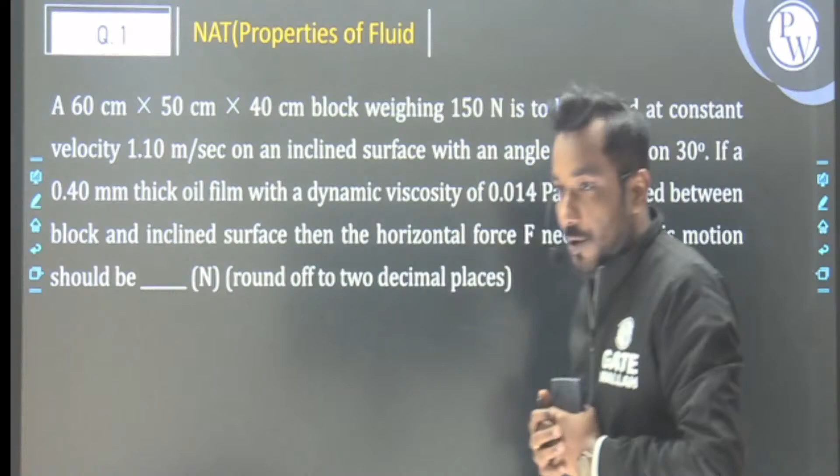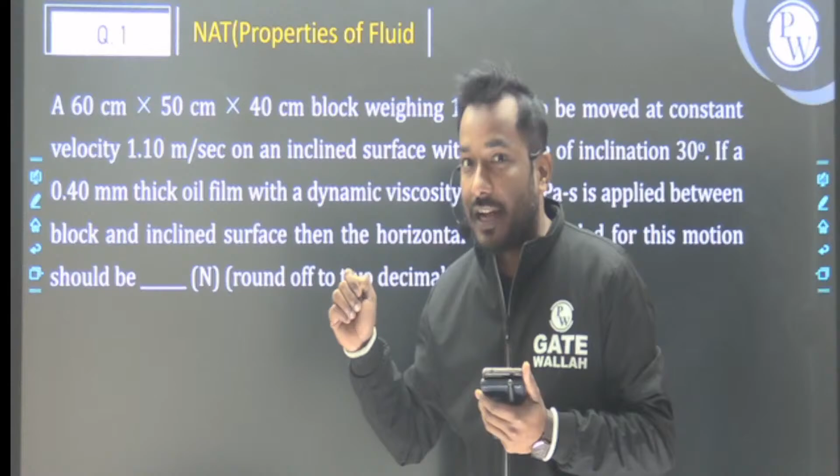So the first question is an NAT type question, and that question is from properties of a fluid. I'm going to read the question first, properly, one by one, and then we should see the solution in a detailed way.

Let me read the question carefully. In the question they are saying: a 60 into 50 into 40 centimeter block, and the weight of the block is 150 Newton. It is to move at a constant velocity of 1.1 meter per second on an inclined surface with an angle of inclination of 30 degrees.

If a 0.40 mm thick oil film with a dynamic viscosity given as 0.014 Pascal second is applied between the block and the inclined surface, then they are asking to calculate the horizontal force F needed for this motion. The answer should be in Newton, and you need to calculate up to 2 decimal places.

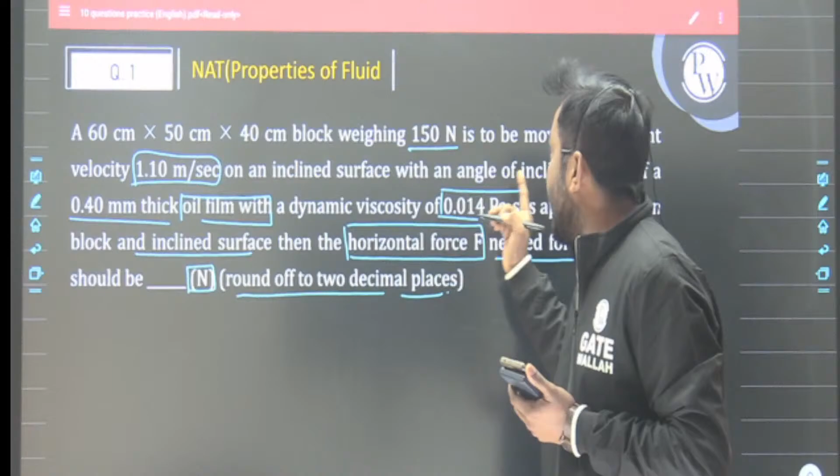In the question, they have given the dimensions of the block and already given the weight, mg, as 150 Newton, moving at a constant velocity of 1.10 meter per second on an inclined surface with an angle of inclination of 30 degrees. Remember, sometimes the inclination angle is given from the vertical, but in this case, the angle of inclination is given from the horizontal surface. With a 0.4 mm thickness oil film of dynamic viscosity 0.014 Pascal second, in SI units, applied between the block and the inclined surface, we need to calculate the horizontal force F required to sustain this motion - the block is moving up the inclined surface.

You should calculate how much force is required in the horizontal direction to maintain a constant velocity of 1.10 meter per second. So it means if velocity is going to be constant, acceleration is 0.

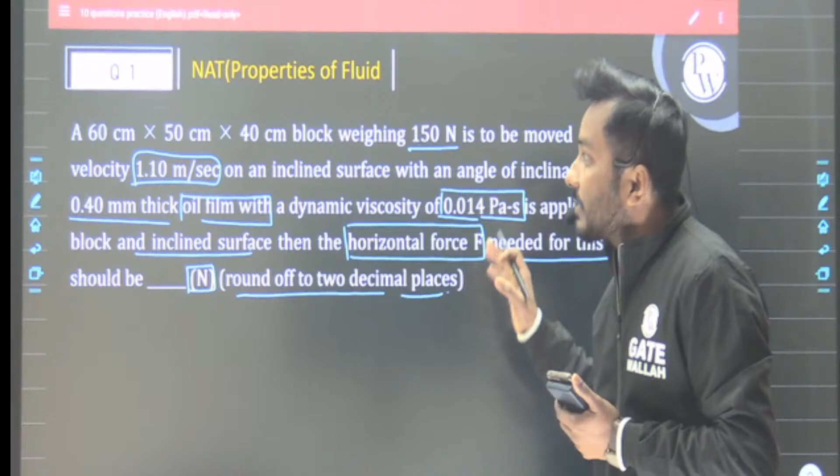First we are going to draw the free body diagram and then apply Newton's second law of motion and balance the forces. Once you get the balance equation, you should easily calculate the force which is required. In this type of question, you should maintain proper concentration, because if you commit a mistake, you will get a wrong answer.

Let me draw the first diagram according to the question. This is our inclined surface, and this is our block, a rectangular block whose dimensions are given. This is our solid block.

The weight of the block is given, and this angle theta is 30 degrees, given from the horizontal. The weight of the block is given as 150 Newton.

Between the block and the inclined surface, we should introduce an oil film, whose dynamic viscosity is given. This is the oil fluid film.

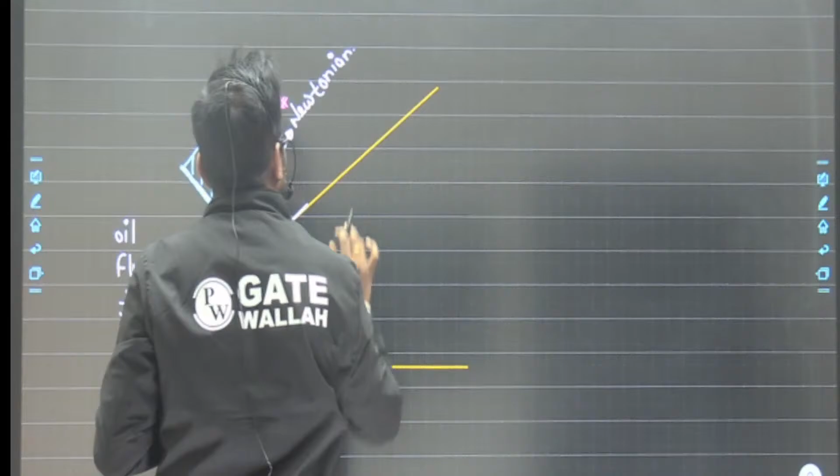The fluid is given as Newtonian. This is our first assumption: Newtonian oil fluid, and the velocity profile is linear.

The velocity profile is a linear velocity profile, so you should assume that. The clearance length is also given in the question.

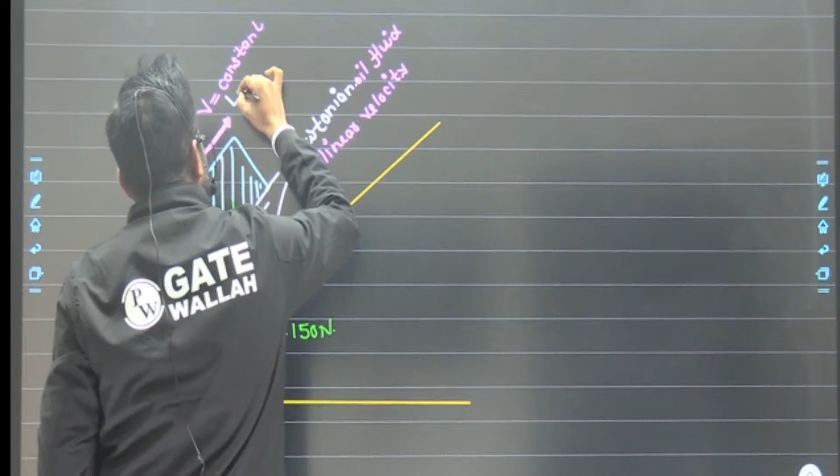If we draw the free body diagram of this block, the block is moving with constant velocity v. If velocity is constant, the acceleration of the block should be 0. When the block starts moving in the upward direction with constant velocity v, acceleration is 0.

But to maintain this type of motion, we need to apply an external horizontal force, and you need to determine this horizontal force. So when the block starts moving on the inclined surface, we apply the no-slip velocity boundary condition at the solid surfaces.

We assume that at this surface y is equal to 0 meters, and at this surface y is equal to h, which is given in the question. The velocity profile is linear, so if you draw the velocity profile in the clearance, you get the slope of this velocity profile.

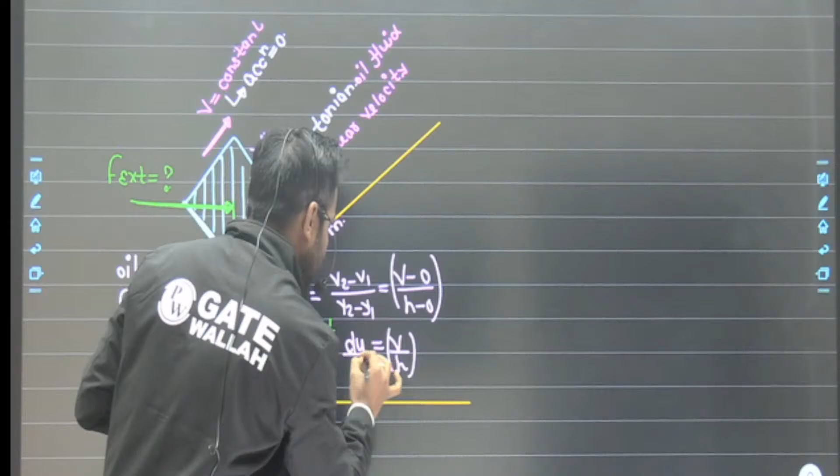What is the slope for this velocity profile? You can write du by dy, at this point the velocity is v, so du/dy equals v2 minus v1 divided by y2 minus y1, that is v minus 0 divided by h minus 0, so that is v divided by h. This is du/dy.

If we draw the free body diagram for this block, let me draw it. This angle should be theta, which is given.

This is the line of action of our weight, and this one is the horizontal force which you applied. If we extend this line of action, this is our external force, and this angle should be 90 minus theta. So in this direction, the component of the weight is weight sine theta.

In this, weight sine theta, and the perpendicular of the inclined surface is weight cos theta. This angle should be theta, and this angle is going to be theta as well.

If we take the component of external force in horizontal and vertical, this is our direction of motion. This one is direction of motion, and this should be perpendicular to the motion.

So if we resolve F external, this angle is going to be 90 minus theta, and this one is theta.

So if we resolve this external force, this component is F external sine theta, and this component should be F external cos theta.

And acceleration is 0, you can say acceleration is 0.

When the block starts moving on the Newtonian fluid, the fluid should offer a resistance opposite to the motion. That resistance force you can write as tau multiplied by area of the surface.

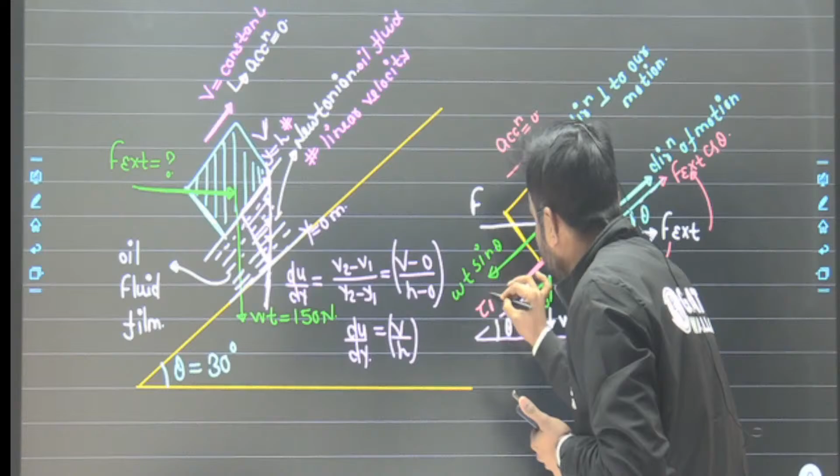So in this direction, one more force will come into the picture, and that is tau multiplied by area. This resistance force is offered by the Newtonian oil or fluid. This film will offer a resistance force opposite to the motion of the block.

In this scenario, the block is moving upward, so the fluid resists in the downward direction. If we consider the direction of motion, there are three forces: in the direction of motion this force acts, and this one and this one are in the opposite direction. So we should apply Newton's second law of motion in the direction of motion.

We should apply the NLM2, Newton's second law of motion, in the direction of the motion.

We should consider the positive direction as the motion direction, and opposite to the motion, let the force be negative in magnitude.

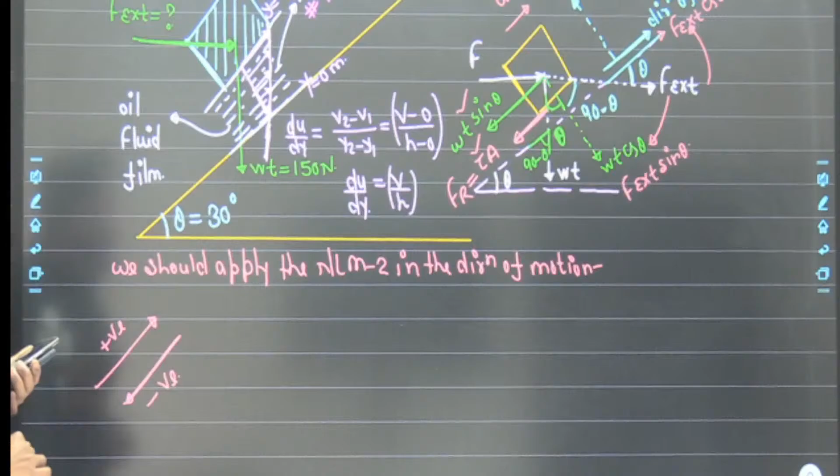So if we balance the forces: F external is positive, F external cos theta should be positive, minus weight sin theta since weight sin theta is in opposite direction, minus tau multiplied by area which is also in opposite direction, is equal to 0, because our acceleration should be 0. So mass into acceleration on the right hand side is completely 0.

So if I put in the magnitude, let me just write F external, and the angle is given as 30 degree.

So that is cos 30 degree, and weight is 150, and that is sin 30 degree, minus tau. For Newtonian fluid, you can write mu du by dy, multiplied by area, is equal to 0.

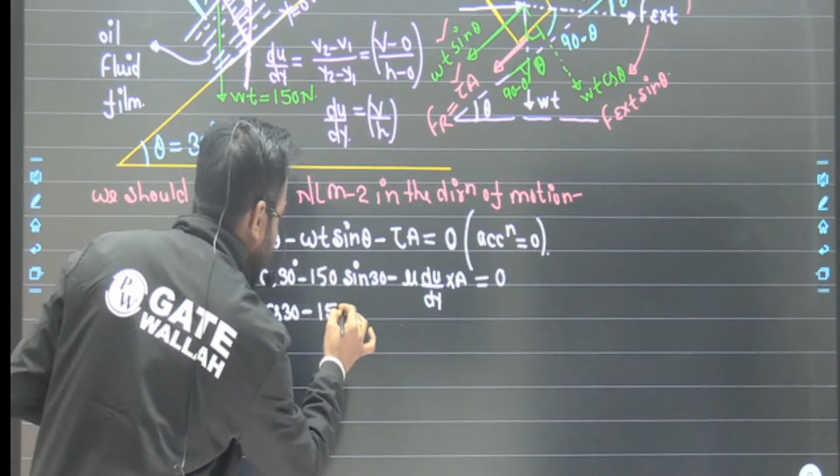So we need to calculate our external force. Let me put another parameter: sin 30 degree, and dynamic viscosity is given as 0.014.

Velocity is given as 1.10 meter per second, divided by clearance. So what should be the clearance? Clearance should be 0.40 mm, so let me write 0.40 mm. We should multiply by 10 to the power minus 3, so that is converted into meters.

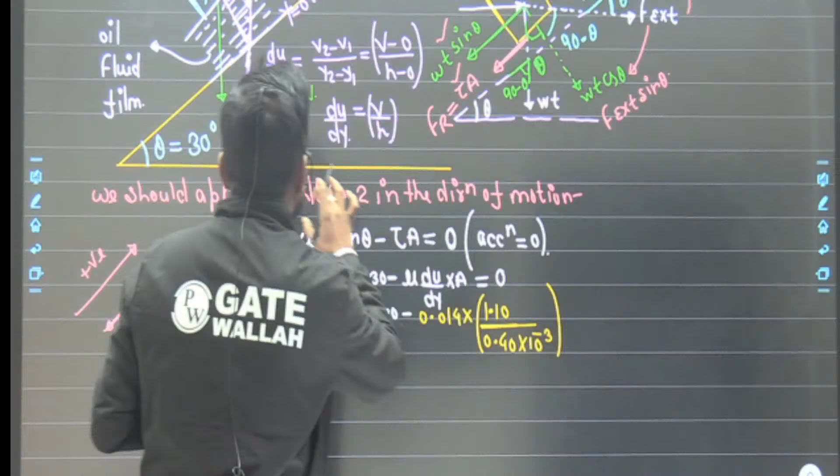And area, what is the area of the block? The dimension is given as this is our length of the block, this is the width, and this should be the height. So the area in contact is length into width.

This face is in contact with the Newtonian fluid. This is our length, and the depth inside the plane is the width. So width into length gives the contact area with the block.

Okay, so where is the calculation? The dimension is 60 centimeter into 50 centimeter. We should convert 60 centimeter into meter, so that is 0.60 multiplied by 0.50 meter. So area is equal to A, is equal to A.

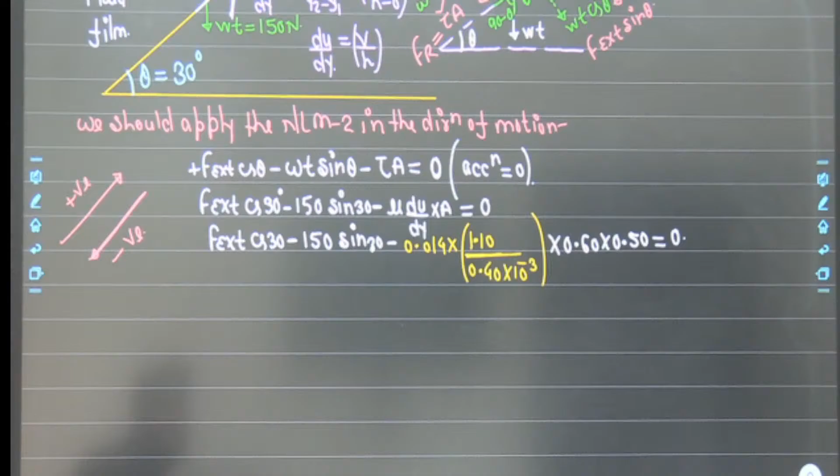Let me just calculate what is the magnitude of the external force. So this is going to be 150 into sine of 30 degree. Let me write: F external cos 30 degree minus 75 minus 1.1 divided by 0.40, multiplied by 1000 multiplied by 0.014 and multiplied by 0.60 multiplied by 0.50. So that is 11.55 is equal to 0.

So plus 75, divided by cos of 30 degree. So our external force will come out to be 99.9393 Newton. This is our external applied force.

But we should give the answer up to 2 decimal places. So let me remove the other digit. This becomes a 4. So the correct answer should be 99.94 Newton.

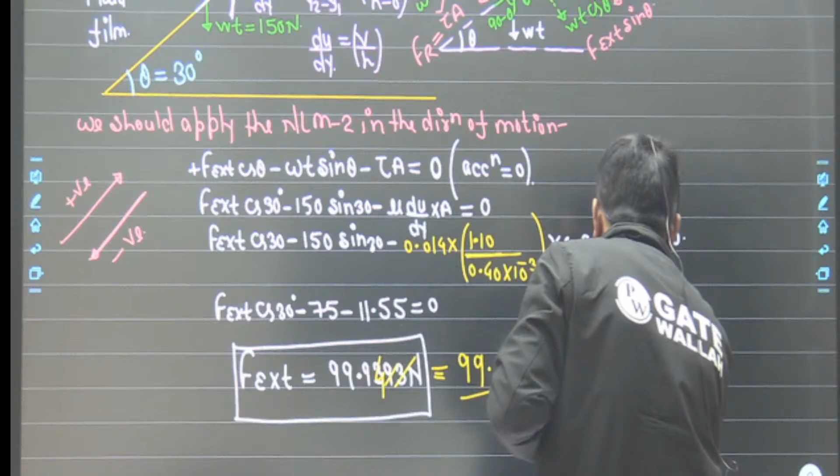The required external force is 99.94 Newton. You require 99.94 Newton of external force to support this type of motion.

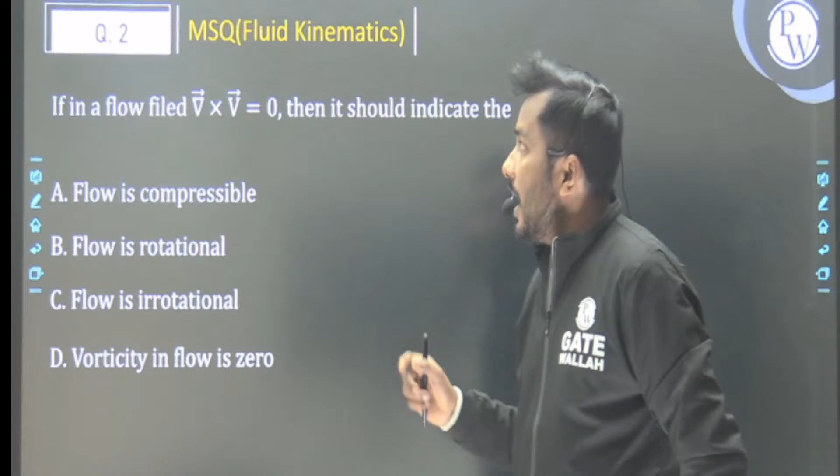In the question they are saying that if in a flow field del cross V is equal to 0, then it should indicate the... that question is one of the best questions from fluid kinematics.

So let me discuss the solution for this question. If curl of velocity vector is 0, our angular velocity is written as half of del cross V vector. So if del cross V vector is 0, our angular velocity also becomes 0.

And if angular velocity is 0, the flow is irrotational in nature. Flow is irrotational in nature.

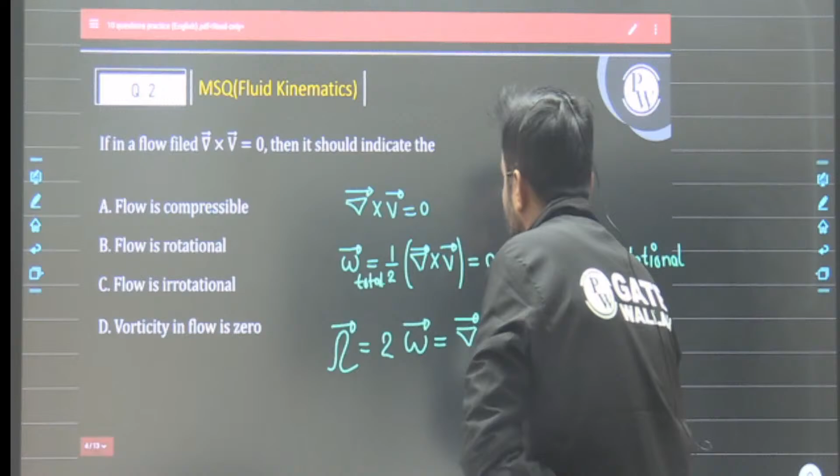So flow becomes irrotational, and we know that our vorticity vector is twice of the angular velocity, which is also del cross V vector. So if del cross V vector is 0, our vorticity also becomes 0. So is flow incompressible?

No. Flow is incompressible when divergence of the velocity vector becomes 0, that is, when del dot V vector becomes 0.

So the correct answer should be... sorry, not B, this is rotational. So the correct answer should be C, and vorticity in flow also becomes 0.

So for question number 2, the correct answer should be C and D. Clear? C and D is the correct answer. The flow should be irrotational in nature, and our vorticity vector is 0. Clear? Vorticity vector should be 0.

This is an MSQ type of question, so if the question is MSQ in nature, more than one option will be correct. For this particular question, the answer C will be correct and D will be correct. Clear? So I hope you understand the solution of the question.

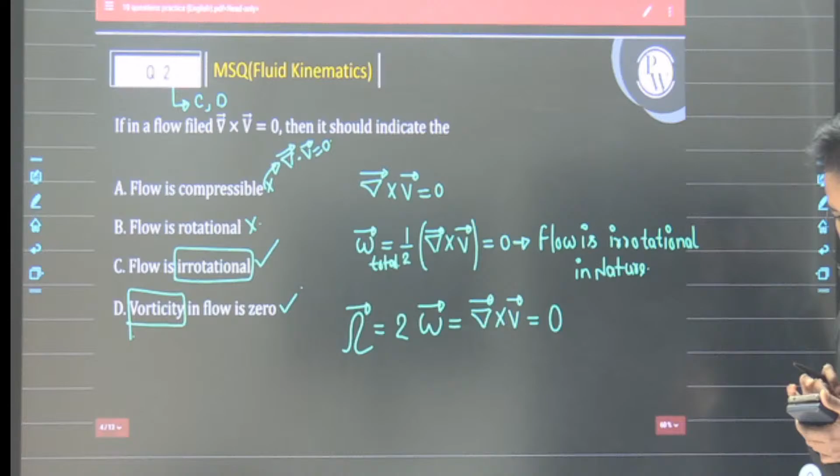So can I move on to the next question? Okay, so let me move on to our next question. Move on to question number 3.

So read the question carefully. Question number 3 is the example of forced vortex motion, and that question is MCQ type. Let me just give the question number. This is question number 2, this is question number 3. So this is question number 3. Read the question carefully, and that question is the example of forced vortex motion.

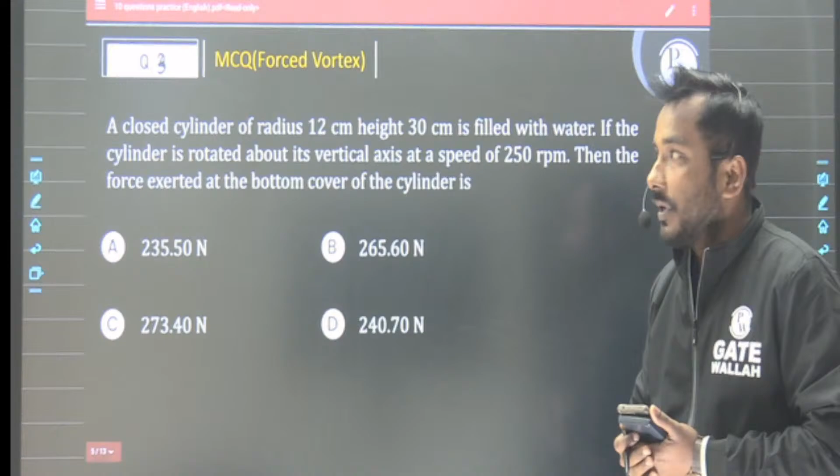Forced vortex motion. Clear? In the question they are saying that a closed cylinder of radius 12 centimeter, radius is given as 12 centimeter, and height is given as 30 centimeter, is filled with water. So further, if the cylinder is rotated about its vertical axis at a speed of 250 rpm, then the force exerted at the bottom cover of the cylinder should be...

Please note, in the question they are saying that the cylinder should be closed. Cylinder is closed, top surface is closed, and the radius is given as 12 centimeter, height is given as 30 centimeter, and rotational speed n is given as 250 rpm. Then you need to determine how much force is going to be acted on the bottom of the cylinder.

So let me first draw the diagram for this question. Clear? So there is a cylinder.

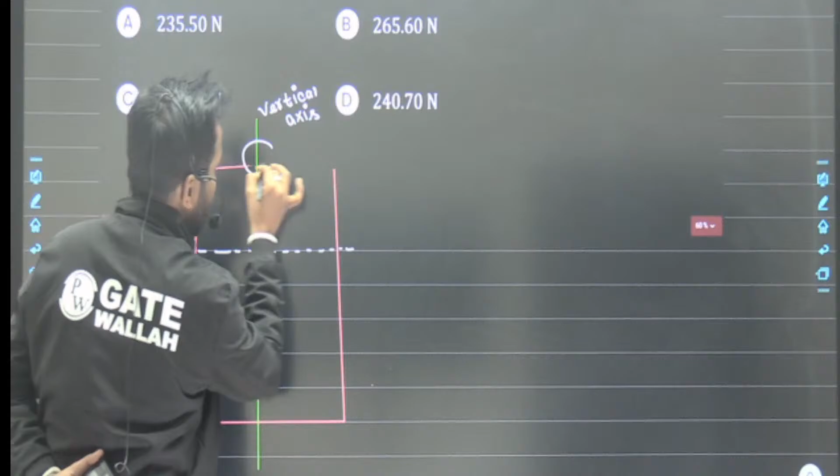This is our vertical axis, and this cylinder is rotated. This one is our vertical axis, and the cylinder is closed. So let me close the cylinder, because in the question they have mentioned that the cylinder is closed at the top. So this one is our closed cylinder, and the fluid is water.

The fluid is water, and we know that the density of water has magnitude 1000 kg per meter cube. The radius of the cylinder is given as 12 centimeter, or you can say 0.12 meter, and the height of the cylinder is given as 30 centimeter, or you can say 0.3 meter.

And the rotational speed of the cylinder is given as n is 250 rpm. Clear? 250 rpm.

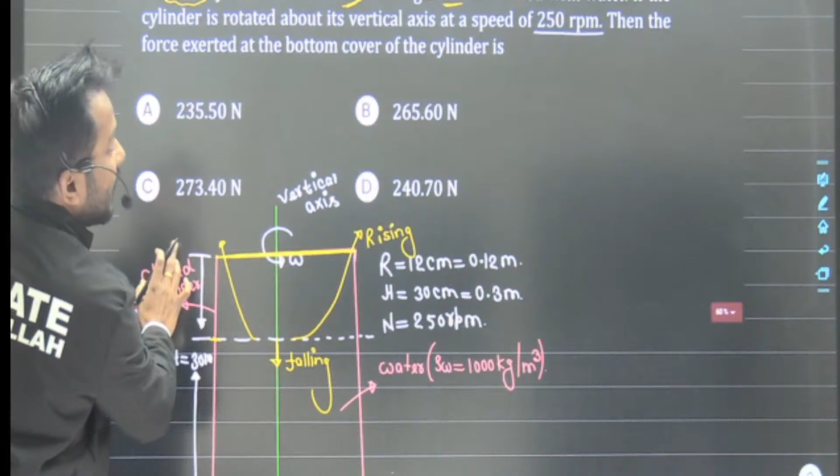So this parameter is given, and we know that if the cylinder is closed at the top, and if we rotate the cylinder, then due to the forced vortex effect, the fluid should try to rise at the surface of the cylinder, and at the center of the cylinder the fluid starts to fall. Clear? At the center fluid starts falling, and at the surface fluid should start rising.

Clear? I think the complete cylinder is filled with water. Actually, the cylinder is completely filled in this question. So let me just correct the diagram. Let me draw the next diagram. Actually, the cylinder is completely filled.

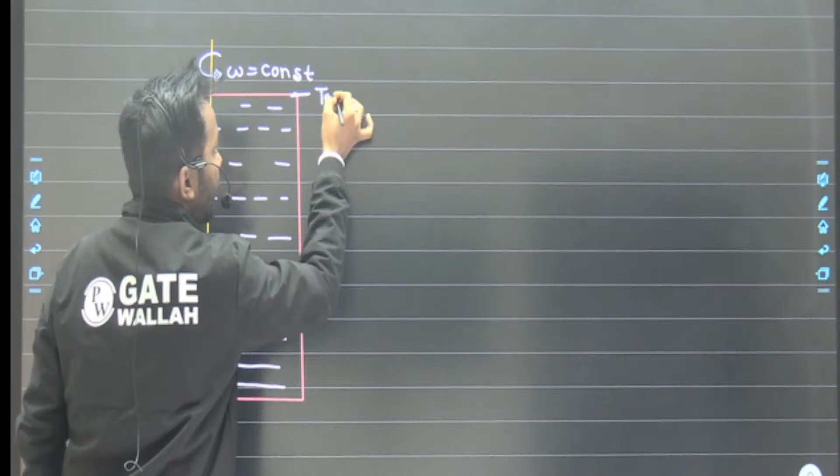So this is the cylinder, and this one is our vertical axis, and the cylinder is rotating about this vertical axis with constant angular velocity omega. So this velocity should be constant. Clear? And the cylinder is completely filled with water.

Cylinder is completely filled with water, so the top surface is closed. This is our top surface, and you need to determine the force at the bottom surface.

Please remember, first consider if the cylinder is not rotating. How much force acts at the bottom of the cylinder? That is equivalent to the weight of the fluid above the bottom surface.

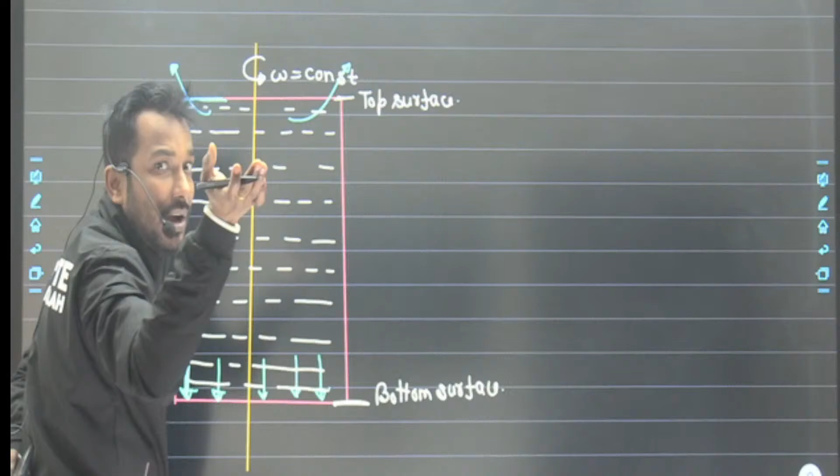So if the cylinder is not rotating, the force acted at the bottom is equivalent to the weight of the fluid. Once the cylinder starts rotating, the fluid will start to rise in the upward direction due to the forced vortex effect. But since it's a closed cylinder, the fluid cannot rise above the top surface.

So that fluid will start to develop a thrust force at the top of the surface. The fluid will try to remove the top surface, and due to the rotation, a thrust will be developed at the top surface, and that thrust will propagate to the bottom of the cylinder.

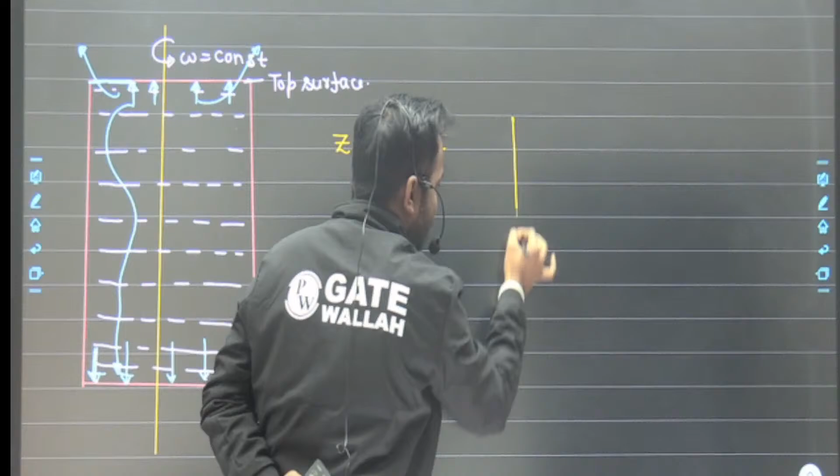So in this question, we need to calculate the total thrust force acting at the bottom of the cylinder. This total thrust force is equivalent to the weight of the fluid plus the forced vortex effect - the force developed due to the rotational effect at the bottom of the cylinder.

We should remember the concept of rise of height in a forced vortex: ZR equals omega square R square divided by 2g. For example, if this is an open cylinder and we rotate it about its central axis, let me draw this diagram for forced vortex, where this axis is our radial axis and this one is our vertical Z axis.

So at any radial distance r, this height ZR should be omega square R square divided by 2g. Okay, omega square R square divided by 2g.

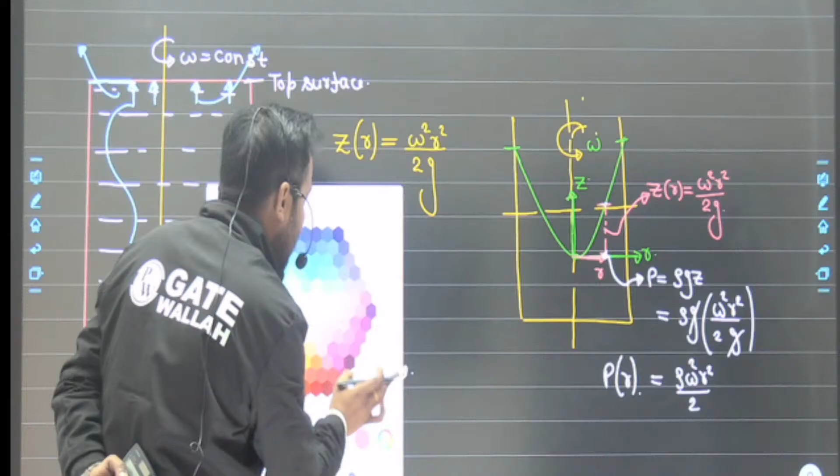So how much pressure will act at this point? The pressure P equals rho g into Z, because the height of fluid is Z. So if we write this, rho into the magnitude omega square R square divided by 2g - the g gets cancelled out, giving rho omega square R square divided by 2. This is the pressure intensity at any location R.

This is the pressure intensity at any location R. And if we write the force according to this pressure intensity, since this pressure intensity varies, to calculate the force we need to consider a small element at the bottom surface, of thickness dr and radius r. So this element has thickness dr, and the area should be 2 pi r dr.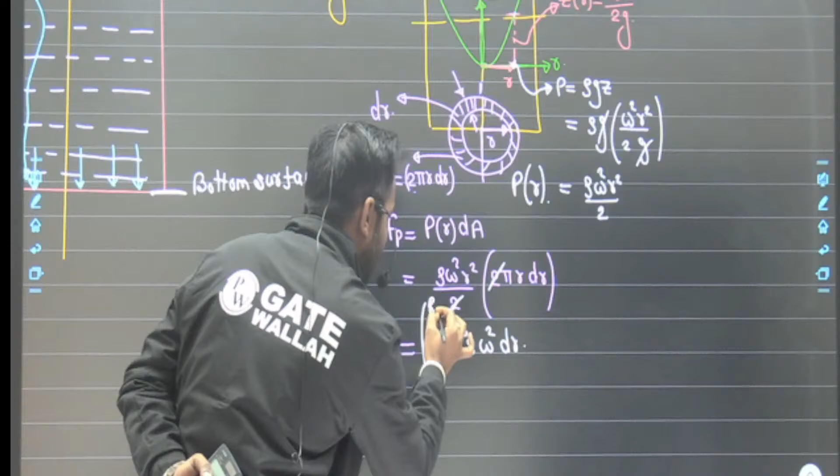So what is the force due to this? Force equals pressure intensity P(r) into area dA. That should be rho omega square R square divided by 2, and area is 2 pi r dr. So the 2's cancel out, giving pi r cube rho omega square dr. That is dF at p.

If we integrate for the total, from 0 to capital R, that comes out to rho pi omega square r to the power 4 divided by 4, with limits 0 to capital R. So what is the magnitude? That is rho pi omega square r power 4 divided by 4, in Newtons. I think this will be correct.

Our P as a function of r is rho omega square r square divided by 2, and if you multiply it by 2 pi r dr, the 2's cancel out, and if you integrate this from 0 to R, you get the pressure force at the bottom.

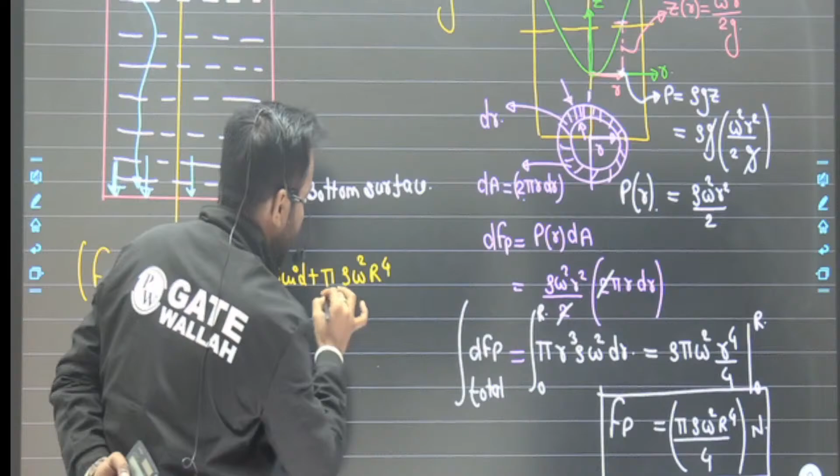Clear? So you should calculate this pressure force. Total force at the bottom of the cylinder is the weight of fluid plus this one, and that force is pi rho omega square r to the power 4 divided by 4.

Let me put the magnitude. What is the weight of the fluid above the cylinder bottom surface? That is pi, and volume is pi r square into h, rho into g. This is the weight, and that is pi rho omega square r to the power 4 divided by 4.

Clear? And what is the value of omega? Because n is given in the question, omega is 2 pi n by 60. Let me calculate omega first. Omega is 2 pi n divided by 60.

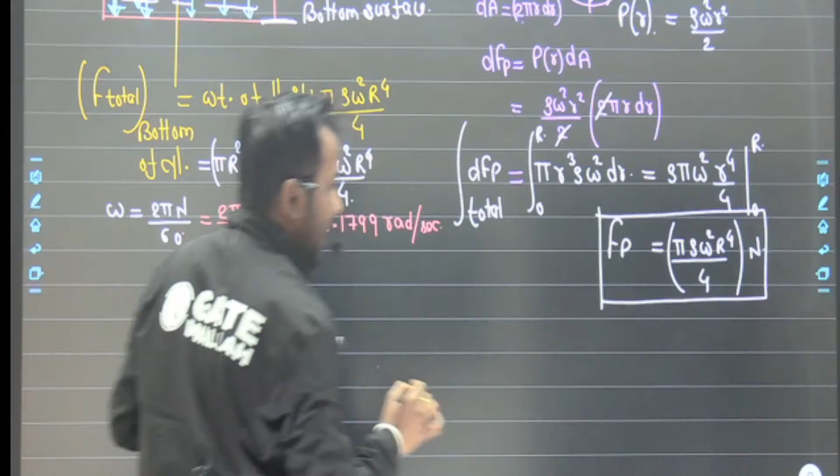n is given to us as 250 rpm. So let me put the magnitude: 250 rpm divided by 60. So 2 multiplied by pi multiplied by 250 divided by 60. That will come out to be 26.1799 radian per second.

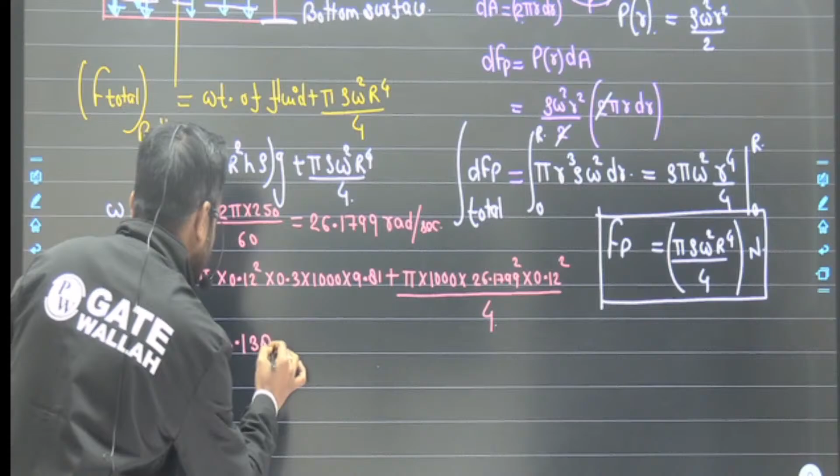R is given, so let me put the value. R is 0.12 meter, and h is given as 0.3, multiplied by rho which is 1000, multiplied by 9.81. Then this value is pi, rho is again 1000, multiplied by omega which is 26.1799 square, multiplied by radius 0.12 square divided by 4.

So calculate this value: pi multiplied by 0.12 square multiplied by 0.3 multiplied by 1000 multiplied by 9.81. This will come out to be 133.1381 Newton, plus this magnitude should be pi into 1000 multiplied by 26.1799 square multiplied by 0.12 square divided by 4.

Let me check where I'm going, that power should be 4. So pi, this is 1000 multiplied by 26.1799 square multiplied by 0.12 to the power 4, divided by 4.

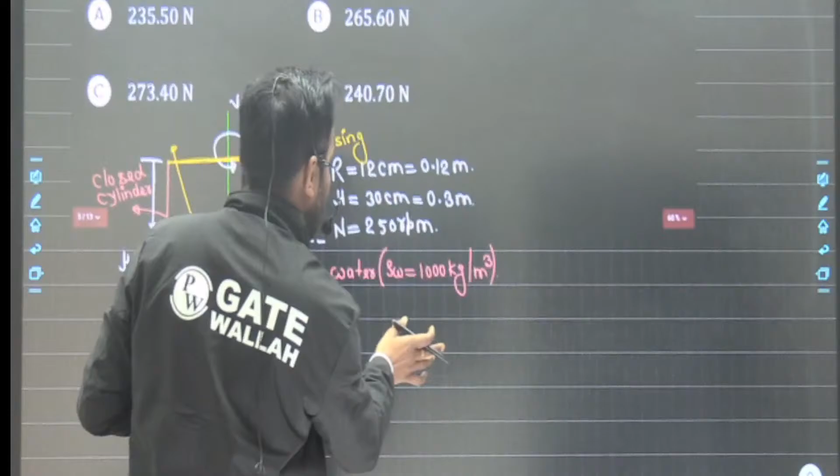That will come out to 111.6226 Newton, plus 133.1381. So that should be 244.76 Newton.

I think I have committed a mistake. 240 is given, but 244 is coming out, so where did I make the mistake? Height is given as 30 cm.

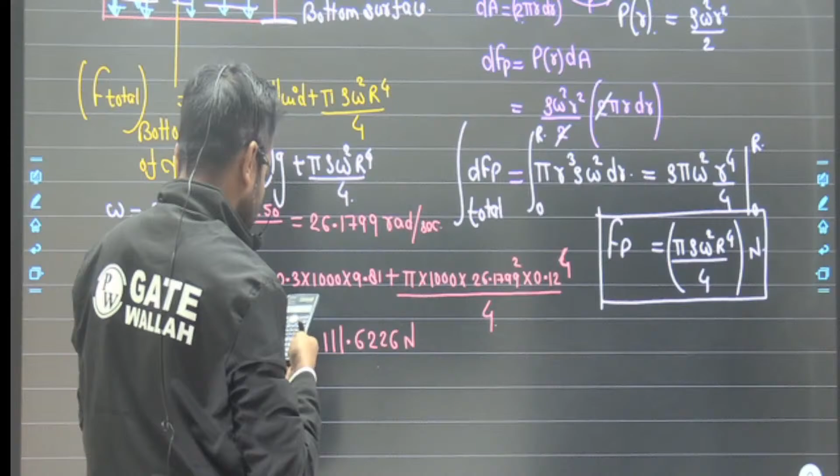Let me cross check the calculation. I put 9.81, height is given as this. So pi r square h rho g, 2 pi n by 60, 2 multiplied by pi multiplied by 250 divided by 60, so that is 26.1799. This calculation is correct, and this is pi multiplied by 0.12 square multiplied by 0.3, which is pi r square h, the volume, multiplied by 1000 multiplied by 9.81, giving 133.138. So that is correct.

Let me check the second calculation. That is pi multiplied by 1000 multiplied by omega, and omega is 26.1799, multiplied by 0.12 raised to the power 4, divided by 4. That comes out to this, plus 133.138, so that is 244.760 Newton. So the answer will be correct.

That answer will be correct. Actually this is 244, please note this is just a printing mistake. So that is 244.76. So the correct answer should be D. For this question, the correct answer should be D.

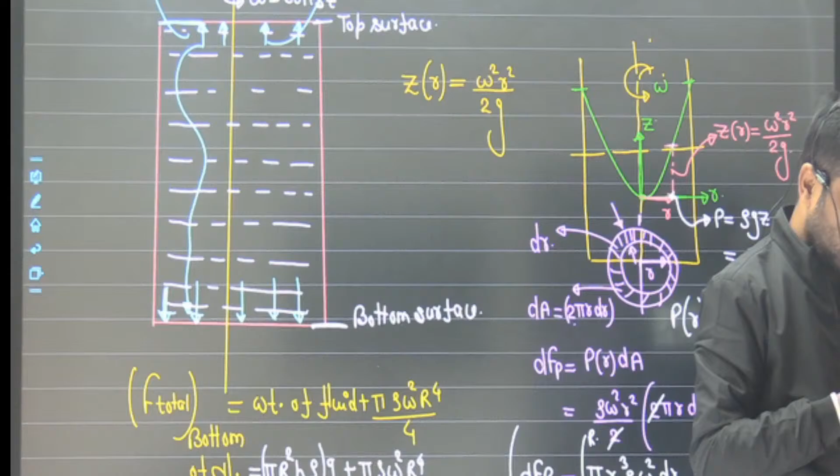This is a complete detailed solution for this question, and I'm expecting this year one question is coming from forced vortex motion. This is the best example regarding forced vortex motion. I think you should understand the complete solution.

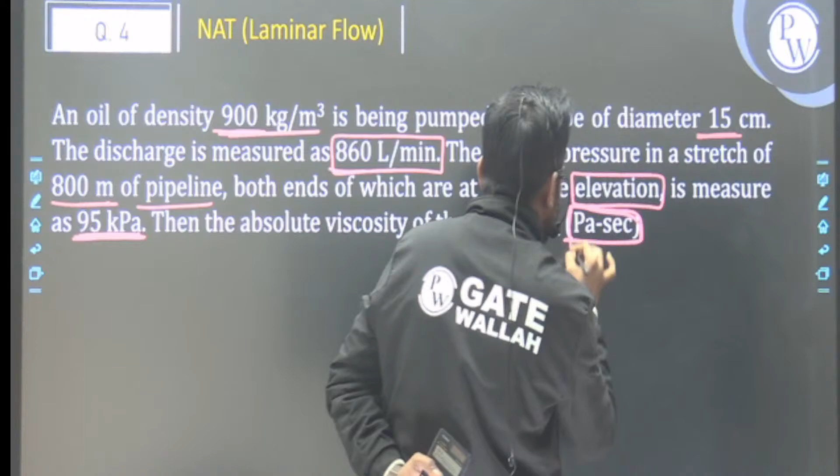In the question they are saying an oil of density 900 kg per meter cube is being pumped in a pipe of diameter 15 centimeter. The discharge is measured as 860 liter per minute. The drop in pressure in a stretch of 800 meter of pipeline, both ends of which are at the same elevation, is measured as 95 kPa. You need to calculate the magnitude of absolute viscosity of the oil in Pascal second.

So let me move to this question on the board. First we should draw the diagram for this question. Let me draw the diagram.

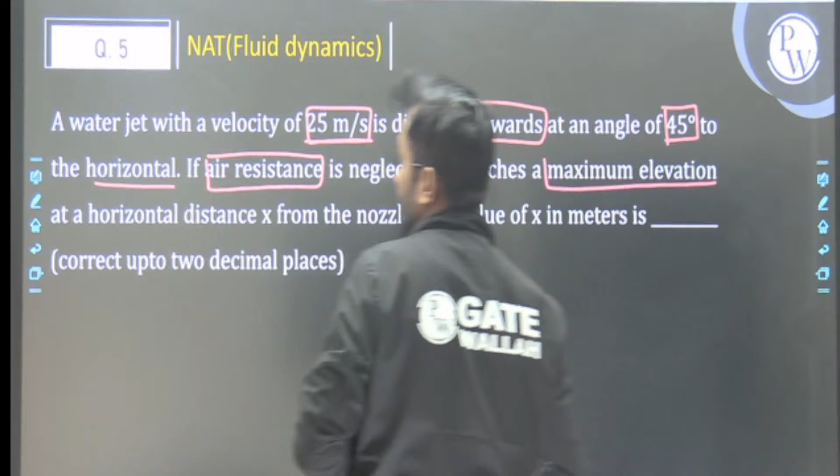According to the question: an oil of density 900 kg per meter cube is pumped in a pipe of diameter 15 centimeter. The discharge is measured as 860 liter per minute. The drop in pressure in a stretch of 800 meter of pipeline, both ends at the same elevation, is measured as 95 kPa. We need to determine the absolute viscosity, and the drop in pressure is given according to the diameter and length, so we should assume the flow is fully developed laminar.

If we assume the flow should be fully developed laminar, we can use the expression for delta P as 32 mu u mean L divided by d square. So delta P is equal to 32 mu u mean L divided by d square.

What is the magnitude of delta P? That is 95 kPa, so we multiply by 10 to the power 3 to get Pascal. So 32 mu we need to calculate, and what is u mean? The mean velocity of the flow should be the discharge divided by area.

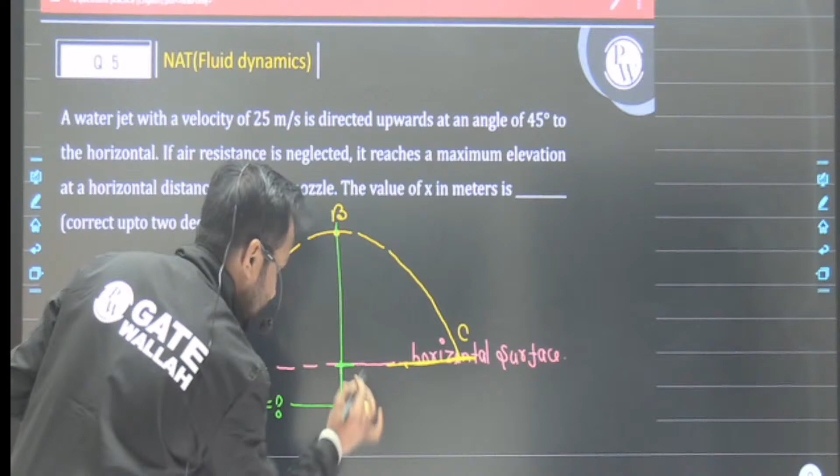What is the magnitude of discharge? That is 860 liter per minute, so we convert this to meter cube per second, and divide by area which is pi by 4 times diameter, 0.15 square. If I calculate this: 0.860 divided by 60, multiplied by 4 divided by pi, divided by 0.15 square.

That comes out to be 0.8110 meter per second - this is our mean velocity of the flow. 860 into 10 raised to power minus 3, divided by 60 because that's liter per minute, multiplied by 4 divided by pi, divided by 0.15 squared. So velocity comes out to be 0.8110 meter per second.

That is the mean velocity of the flow, and length is given as 800 meter. So velocity is 0.8110, length is 800 meter, and divided by d square, where d is 0.15 square. So the value of dynamic viscosity from here we can easily calculate.

That is 95 into 0.15 square, multiplied by 1000, divided by 32, divided by 0.8110, divided by 800. So the dynamic viscosity comes out to be 0.10295 kg per meter second, or you can say Pascal second.

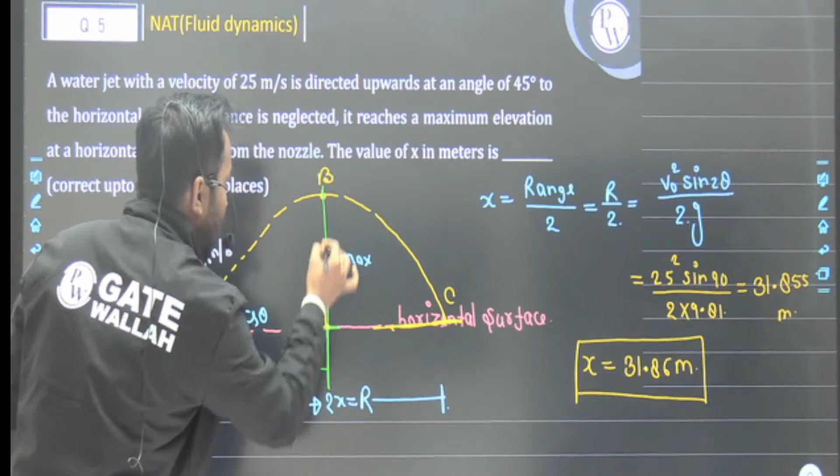Question number 5. Let me move on to our next question. Question number 5 is a NAT type question from the fluid dynamics topic. First you should read the question carefully, and then we should solve it.

In the question they are saying that a water jet with a velocity of 25 meter per second is directed upward at an angle of 45 degree from the horizontal. If air resistance is neglected, it reaches a maximum elevation at a horizontal distance x from the nozzle. The value of x is in meter.

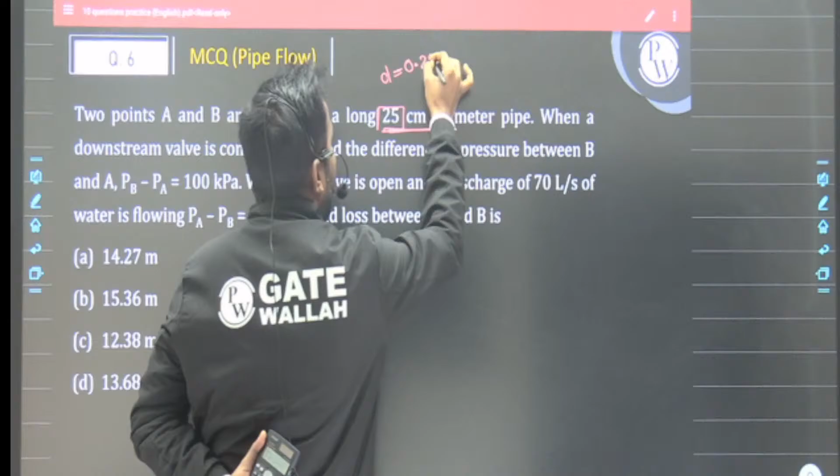So in question number 5, if we draw the simple diagram, we can say there is a nozzle placed inclined from the horizontal. This is our nozzle, and this is our horizontal surface. The jet is issued from this nozzle with a velocity V0, given as 25 meter per second, and this velocity is at an angle theta.

This jet should follow the projectile trajectory, and at some point let me consider this point A, the topmost point is point B, and this point should be point C. So you need to determine this length x, the magnitude of x, because at location B the y should be the maximum.

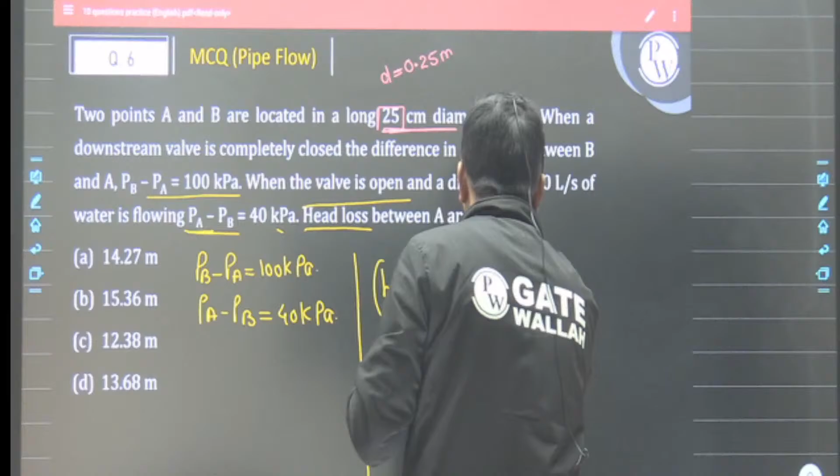Y should be maximum, and we know the formula for this complete 2x, and that 2x is called the range in projectile motion. So basically our x is equal to the range divided by 2. If you know the formula for range, you can directly put the value of r, or the expression for r, and calculate x.

Or you can apply the balance equation, component equation. In this direction the velocity should be V0 cos theta, and vertical should be V0 sin theta. Use the basic concept of mechanics, or put the value of r, which is V0 square sine 2theta divided by g, and that divided by 2.

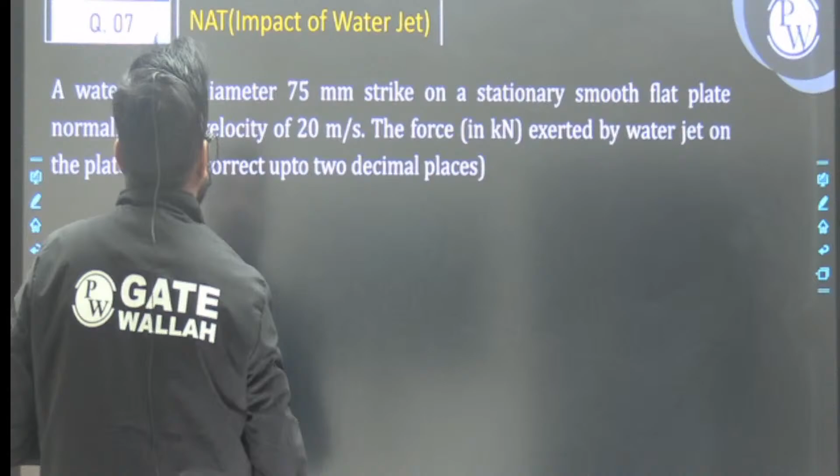So if we put the magnitude of velocity, that is 25 square multiplied by sine 2 into 45, so that becomes sine 90 degree, divided by 2, and g should be 9.81. So that will come out divided by 2 into 9.81, which gives x equal to 31.85 or 31.86 meter, at which the vertical height is maximum.

Vertical height should be maximum. I think you get the correct answer for this question. If you don't remember or haven't learned this formula, you can just use a simple basic kinematic equation, using the components of velocity in horizontal and vertical directions, to calculate the value of x.

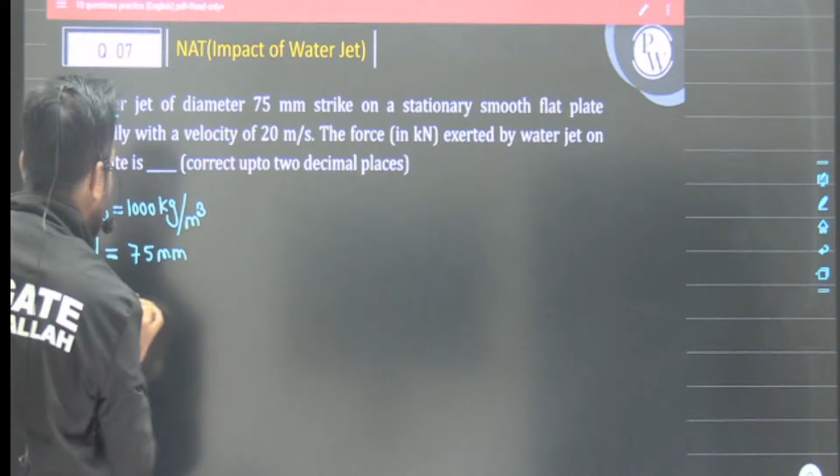Maybe one or two questions are asked from pipe flow and laminar flow. So both topics are important and crucial. Please focus on laminar and pipe flow.

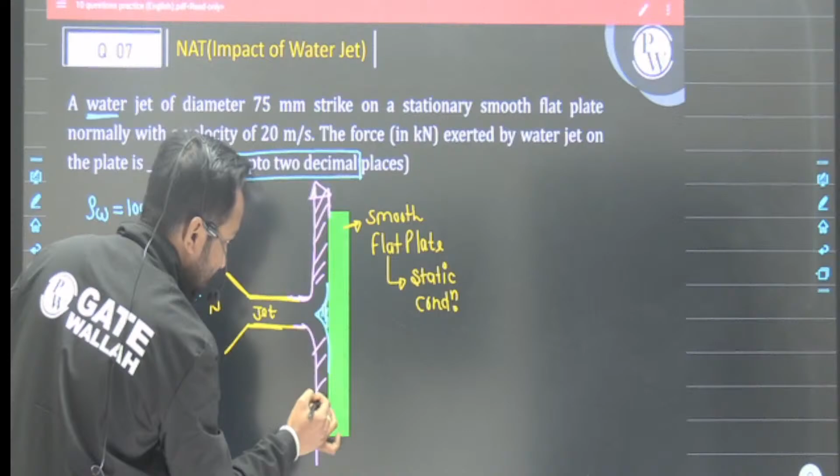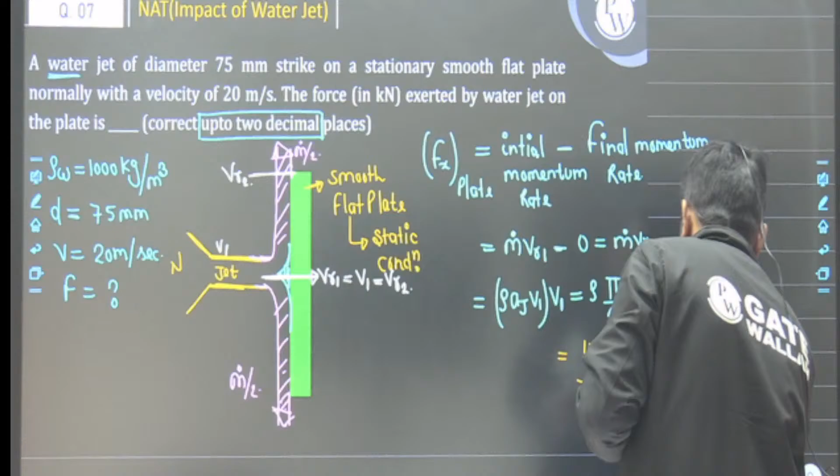Impact of water jet on a solid surface. Please read question number 7 carefully.

In question number 7, they are saying that a water jet of diameter 75 mm strikes a stationary smooth flat plate normally, with a velocity of 20 meter per second. You need to calculate the force in kilonewton exerted by the water jet on the flat plate.

So what is given in the question? A water jet, so the fluid is water. The density of water is 1000 kg per meter cube, and the diameter is given as 75 mm.

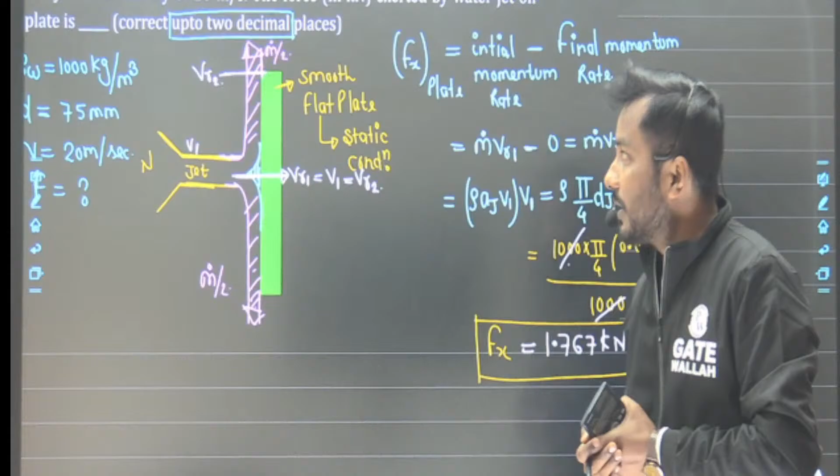It strikes a stationary smooth flat plate normally with a velocity of 20 meter per second. You need to determine the force in kilonewton on the plate, up to 2 correct decimal places.

Let me draw the diagram. This is our flat plate, and let me place the jet splitter here. A water jet comes out and strikes the flat plate. This is our nozzle, and this is the jet. The plate is stationary, so this is a smooth flat plate.

This is our smooth flat plate, and this plate is in a stationary, or static, condition. When the jet strikes at the center of this plate, the jet splitter splits this jet into two equal portions. Half the mass, m by 2, goes in the upward direction, and the other half moves in the downward direction.

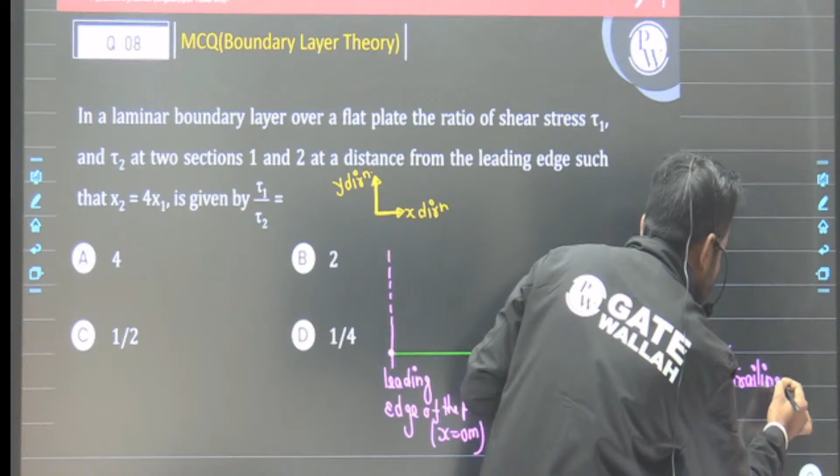So the horizontal force needed, or developed on the plate, we can write as Fx on the plate, which is the rate of change of linear momentum of the fluid, or the reverse force acted on the fluid element. So you can write: initial momentum rate minus final momentum rate.

So what is the initial momentum rate? Velocity and diameter are given, so you can write m dot. Velocity is vr1, and the final velocity in the x direction becomes 0. So that is m dot into VR1. In this problem, VR1 equals V1, and m dot equals rho times area times V1, which is our mass flow rate. Multiplied by V1, this becomes the force.

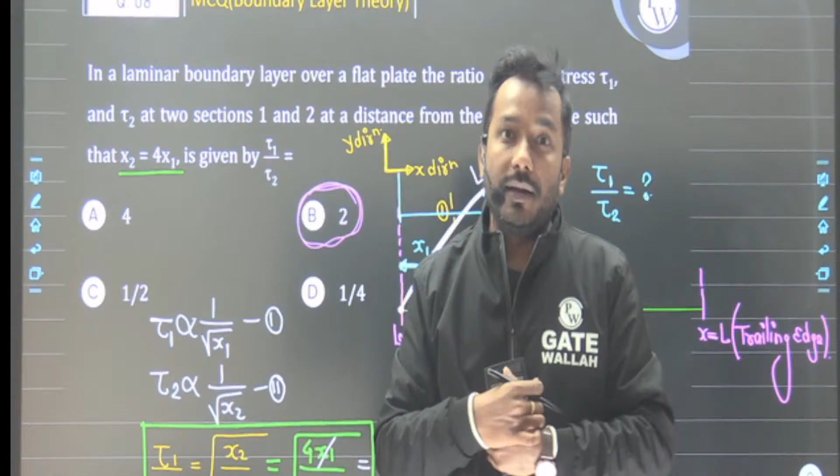So A, rho, and area should be pi by 4 times diameter squared, multiplied by V1 to the power 2. Let me put in the magnitude of each parameter: 1000 multiplied by pi divided by 4. The diameter is 75 mm, so 0.075 squared, multiplied by velocity which is given as 20 meters per second, so that is 20 to the power 2.

If we calculate and divide this expression by 1000, we get the magnitude in kilonewtons, so the 1000 cancels out. Let me calculate this magnitude: pi divided by 4 multiplied by 0.075 squared, multiplied by 400 Newton.

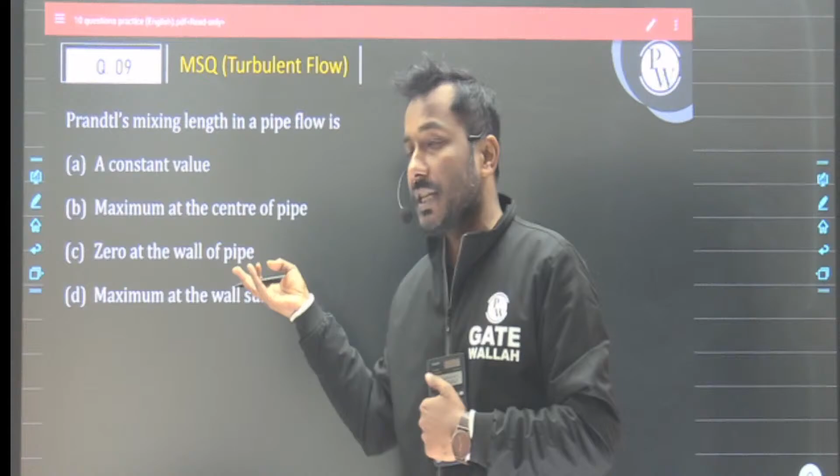So the answer comes out to be 1.767 kilonewton. Let me check once more: pi divided by 4 multiplied by 0.075 to the power 2, multiplied by the square of the velocity, that is 400. So the answer comes out to be 1.767 kilonewton, or you can write 1.77 kilonewton. This is the force applied by the water jet on the flat plate in the x direction. This is the magnitude of Fx, which should be 1.77 kilonewton, the force developed on this flat plate.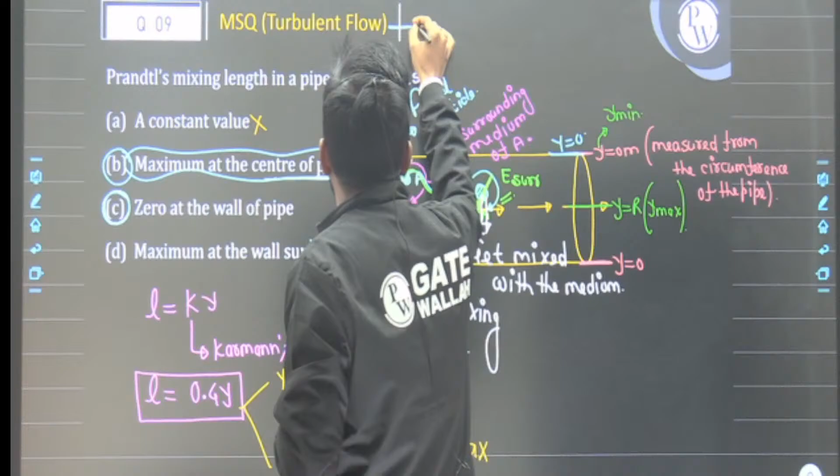So I'm just going to put the magnitude of x2 and x1. The relation is given as x2 is 4 times x1. So x1 gets cancelled out, and under root 4 is 2.

So the ratio will be 2, and the correct answer for this question is answer B. B is the correct answer for question number 8, which is an MCQ type question from boundary layer theory - one of the easiest questions you can plan from boundary layer theory.

Please revise boundary layer theory. It is the most important and most critical topic in complete fluid mechanics, which requires a lot of effort and practice. If you are a serious candidate for GATE 2023, please practice more questions from laminar flow, pipe flow, and boundary layer theory.

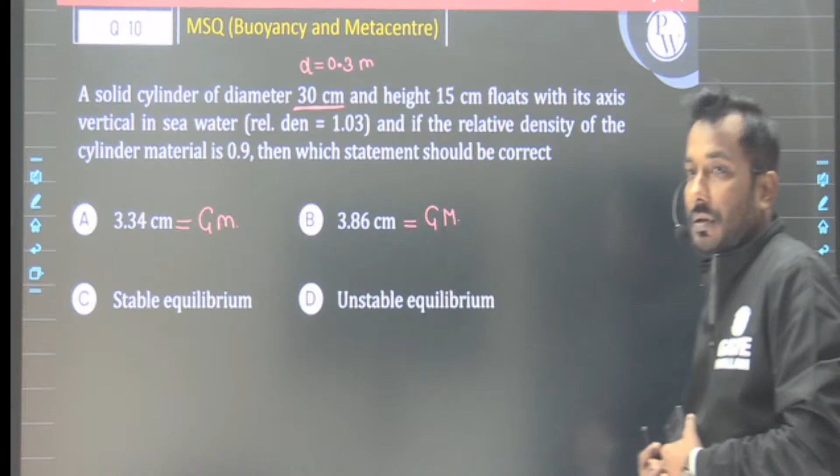Next one is Moody's diagram, which is the most important topic in complete turbulent flow. So 2 to 3 topics are most important: one is Prandtl mixing length, second is velocity distribution, and third is Moody's diagram. One more concept you should go through is how to find the mean velocity variance, or the intensity/magnitude of turbulence - that is also sometimes asked in GATE examination.

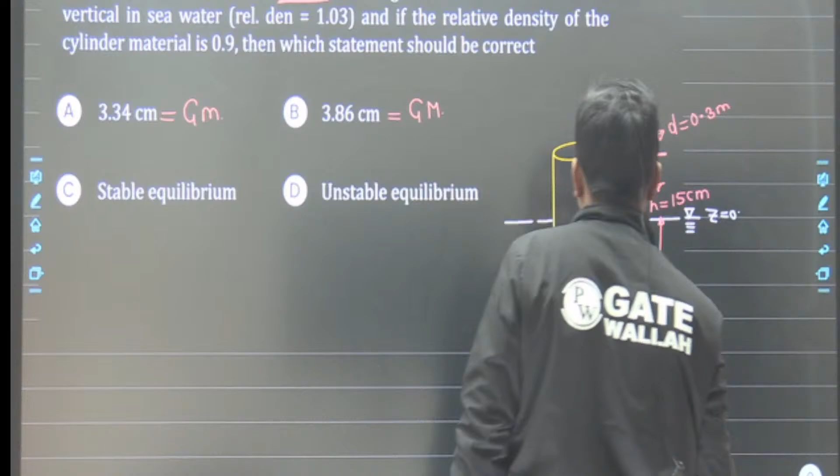So what is the Prandtl mixing length? The Prandtl mixing length is defined as the distance traveled by a fluid molecule in the flow field corresponding to the excess energy or excess momentum. So what do you mean by excess energy or excess momentum?

See, let me consider one pipe in which fluid is flowing. So what will happen, if you remember, at y is equal to 0 meter. Y is measured from the circumference of the pipe. So y is equal to 0 meter at the circumference of the pipe.

So y is minimum at the surface, you can say this y will be the y minimum. And at the center line of the pipe, y is equal to capital R, or you can say at the center line y is a maximum.

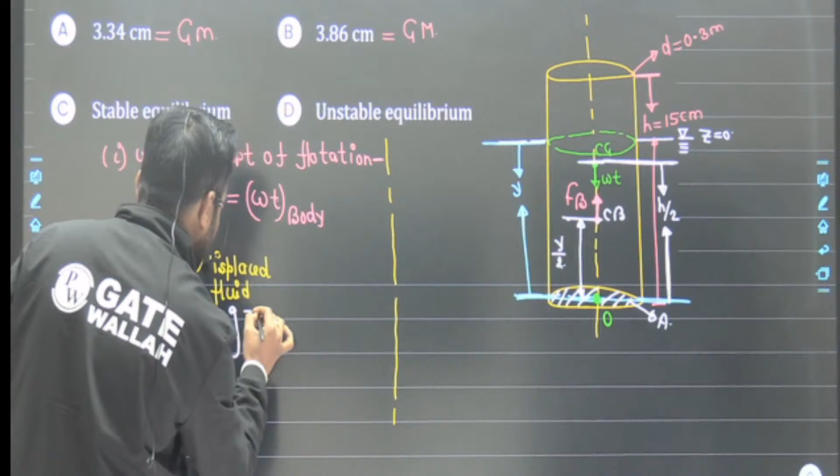So consider any fluid particle in this flow field. Let's say this is a fluid particle A, and this is the surrounding medium of A. This fluid particle has some energy, and that energy is higher than the surrounding medium, so E of A is greater than E surrounding. So this has some higher energy level.

So due to this high energy level, this molecule will start the motion. And let me come at some other location, where the surrounding energy becomes equal to the energy of the molecule A. This surrounding energy becomes equal to E of A, and once these both quantities become equal, the molecule stops at this location.

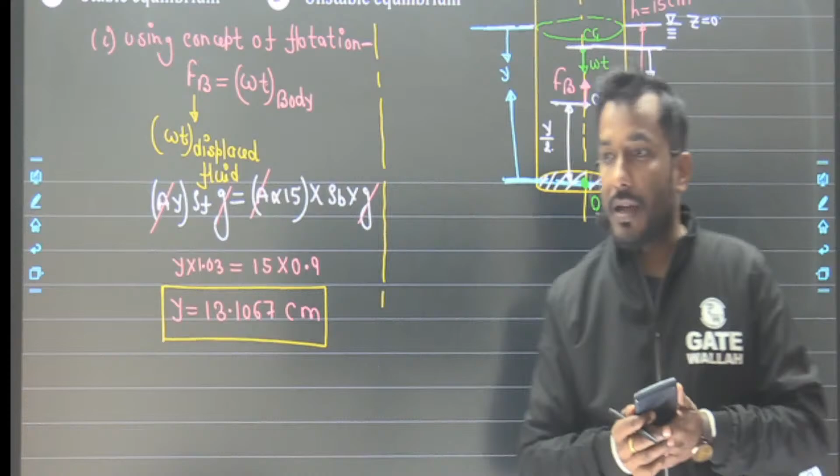So the distance traveled from this location to this location is called the Prandtl mixing length, because at this new location molecules get mixed with the surrounding medium, and you cannot identify which molecule came from location A. So the distance traveled by this molecule from this location to this location is called the Prandtl mixing length.

That length is represented by L. So what is the Prandtl mixing length? Prandtl related this length by K into Y, and that K is called the Karman constant. The value of this Karman constant is 0.4 for our course. So L becomes 0.4 times Y, where Y is measured from the circumference of the pipe. So let me just read the option.

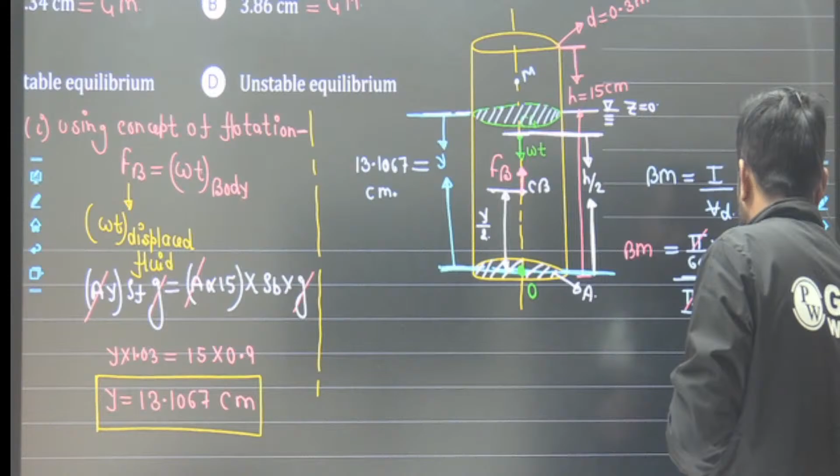Maximum at the center of the pipe - I think this is correct, because Y is maximum at the center. When Y is equal to 0, Prandtl mixing length becomes 0, and that is the minimum value. When Y is equal to capital R, L becomes maximum, that is 0.4 times R, and that should be L maximum. So that will become the maximum value.

So in B, maximum at the center of the pipe. So option B will be correct.

C says zero at the wall of the pipe. At the circumference of the pipe, Y is 0, so at the wall the Prandtl mixing length becomes 0, or minimum. So this is also correct - C is also correct. And maximum at the wall surface - no, this is wrong. Minimum at the wall surface.

So for question number 9, which is an MSQ type question, the correct answer should be B and C. Question number 9 has correct answer B and C.

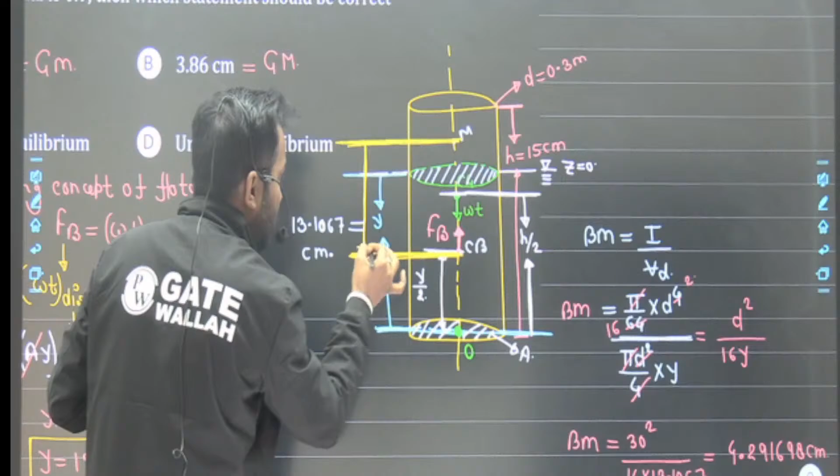Okay, so I think you should understand the concept. So let me move on to our next question and last question of this session, that is question number 10.

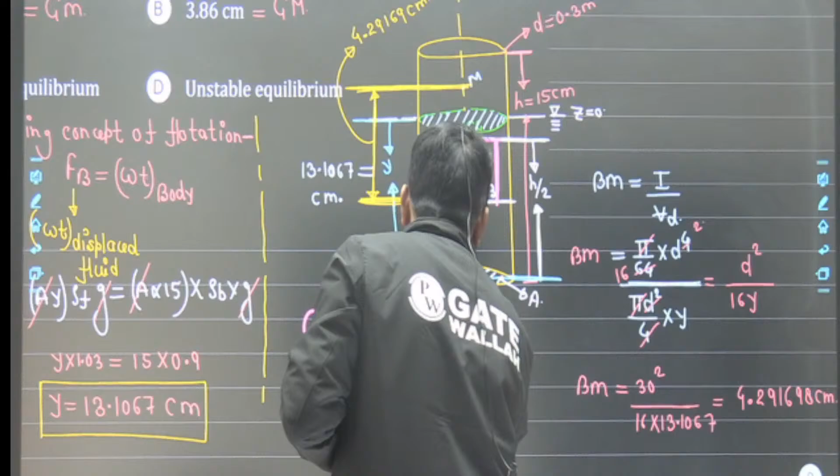Please read through this question carefully. That question is again an MSQ type question, which is taken from buoyancy and metacenter. Please read this question carefully - this is the last question of the session.

Let me explain the question. In this question they say that a solid cylinder of diameter 30 centimeters, so D should be 0.3 meter, and height 15 centimeters, floats with its axis vertical in sea water of relative density 1.03. If the relative density of the cylinder material is 0.9, which statement is correct? You need to calculate the metacentric height, that is GM, and determine the type of equilibrium for this condition - whether the cylinder is in stable, unstable, or neutral equilibrium.

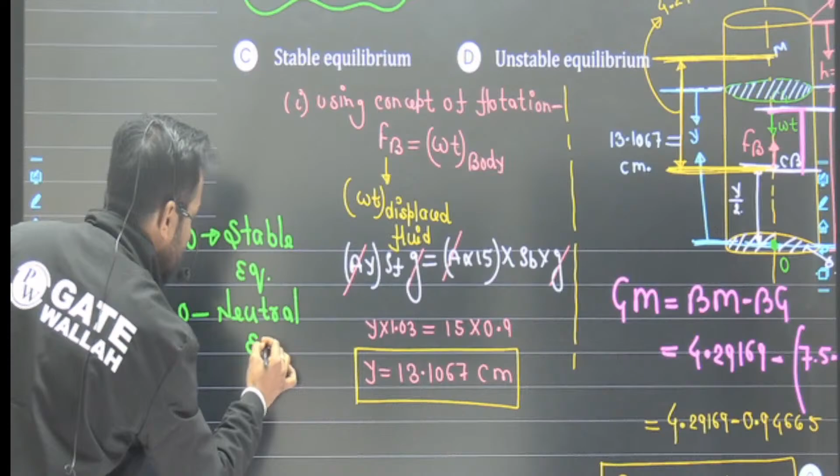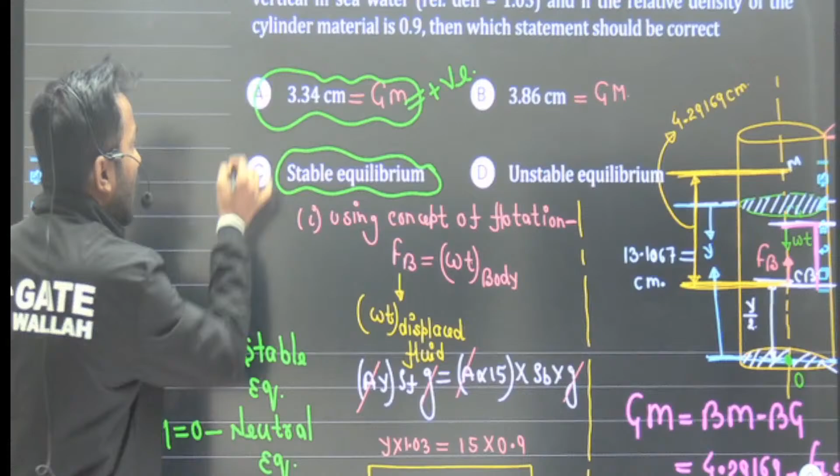In this question, first we should draw the proper diagram so you can understand what is being asked. There is one cylinder floating in a liquid medium whose density is given in the question. Let me assume this is the free surface, so Z is equal to 0 meter. The diameter of this cylinder is 30 centimeters, so 0.3 meter, and the height is given as 15 centimeters. If I assume the depth of submergence of the cylinder is y, and at the bottom face we consider this point O, let me consider this as point O at the bottom surface.

Then there are two different forces. One is the self weight of this cylinder, which acts at the center of gravity of the body.

So that is a weight. And another force is the buoyancy force, which is acting due to the medium of the fluid. The application of buoyancy force is the center of buoyancy. Center of buoyancy is the center point of, or you can say CG of, the displaced fluid element.

So where is the center of buoyancy? Somewhere here, this is our CB point, and this value is y by 2. Clear? This value should be y by 2. And this CG height is L by 2, or you can say h by 2. This is h by 2, and this is y by 2.